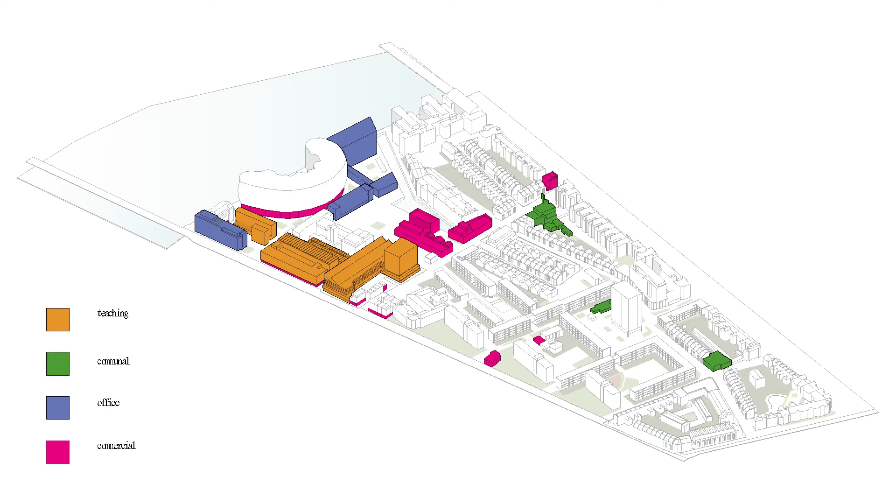It has its own university campus, the Royal College of Art, office space near the river, townhouses as well as two-floor apartments in blocks of flats, a boxing place, and a communal house. The walking routes are good and varied. Streets are relatively nice to walk in.

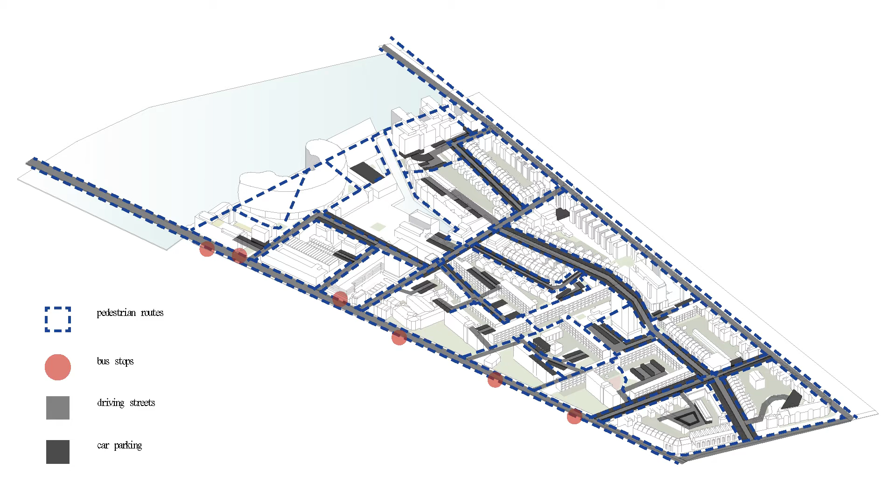However, like in a typical neighborhood in a large city, there is much potential that is lost for various reasons. The squares that could be used for gathering in common, playing in common, gardening in common, or doing sports in common are used mostly for car parking. What could be done here to improve this neighborhood?

We have now chosen the input of communal living for the task of bringing more life to Ethelburga. But what criteria could support our goals? There is not one answer, but based on our studies and research on the subject, we could try choosing communality levels, mixed-use development, pedestrian-friendly development, public property, inclusive design, and cultural identity. The more exact descriptions can be read here.

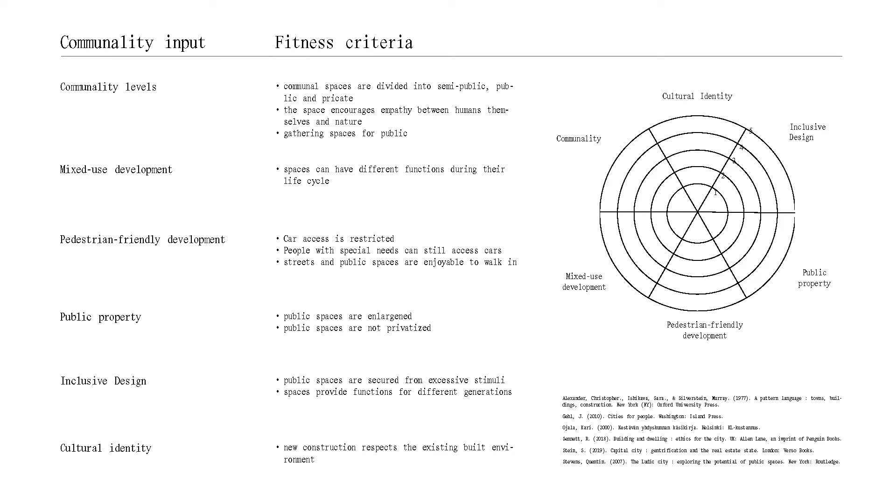Let's generate with augmented intelligence multiple options and then measure with the chart. These are the results AI gave for generating public space. As seen, it is not a simple task. We can conclude, however, that taking singular ideas from each—for example, the architecture in the second image, the pedestrian friendliness of the fourth, and the mixed character of the multi-generational tools—we could generate better space for Ethelburga.

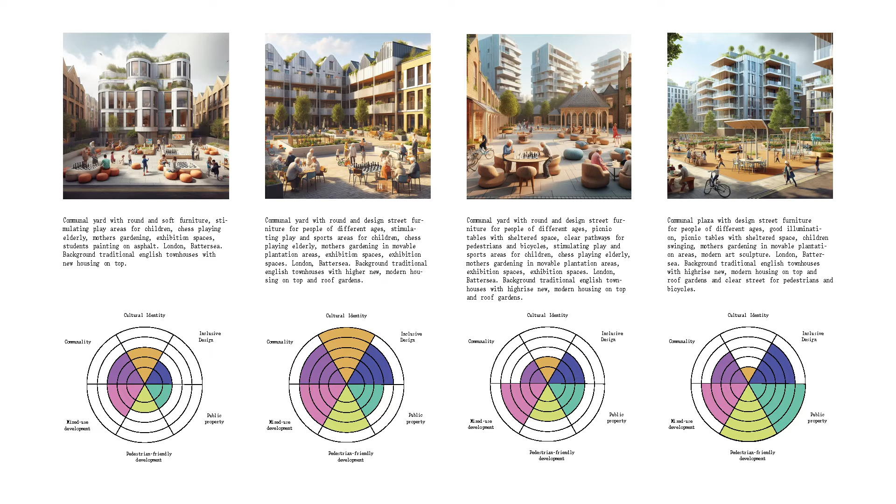Then, let's go back and use this on Ethelburga. As said, the housing from the era of 1960 to 1970s is flexible, in good condition, and easily modifiable. We could use the good floor plans of the existing buildings as modules to generate towards our last justified goals in the area. The floor plans allow the space to be used in mixed ways.

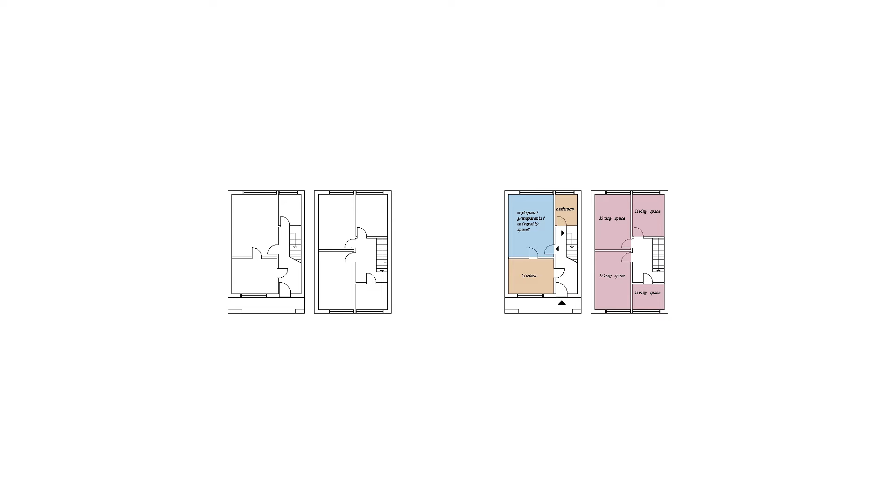Examples of use could include multi-generational use, working spaces, or having a sublet downstairs while the space upstairs is living space. Moreover, the floor plans have potential for a balcony to be added to the side of the hallway. The balcony, to reach the goals of this project, could be used in communal ways. This is one solution for how the evolutionary design could be applied to the estate.

The masses are mainly placed on top of the existing buildings. As a core idea of this project, buildings are not going to be demolished. The masses take evolutionary style from the existing building near the tower. It accentuates the lower masses and brings set points to the facades.

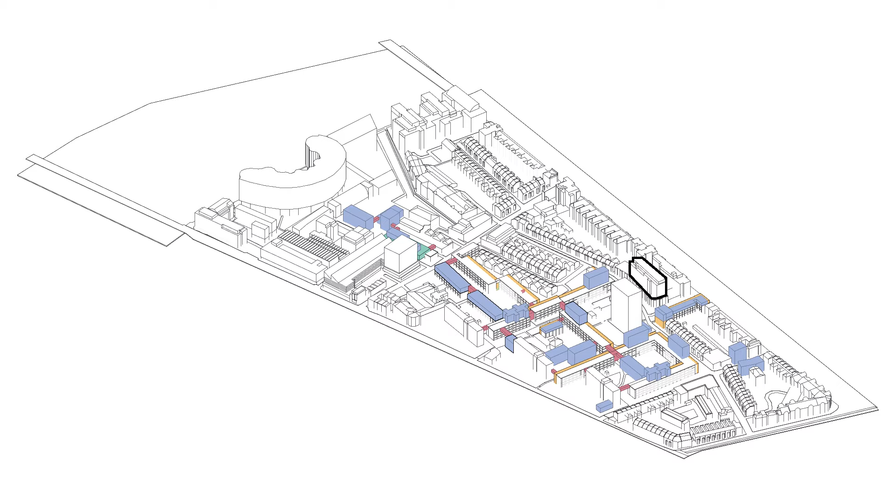The existing buildings have received balconies as mentioned, and they are also connected to each other with hallways. The roofs are turned into communal rooftop gardens and playing and gathering areas. In addition, parking is centralized to a mixed-use building close to the RCA campus building.

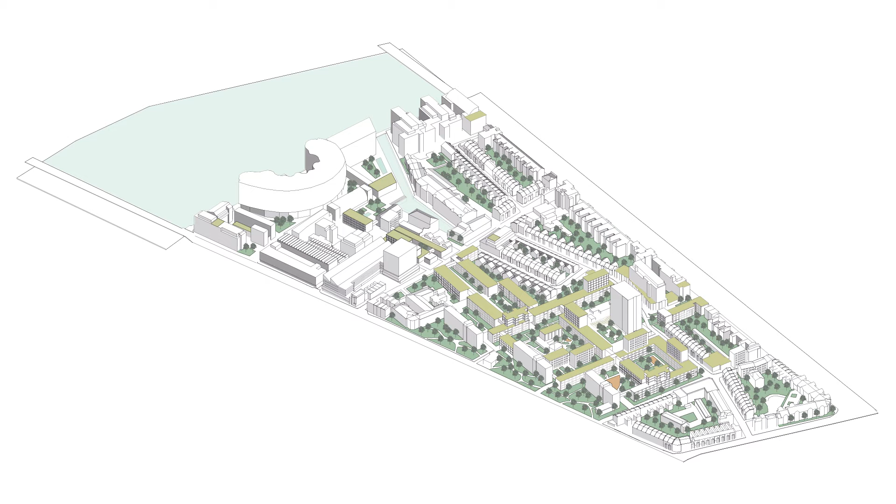And this is how it could look like. The parking areas that have been removed or reduced are used as parks, gardens, and play areas. The area has received multiple new squares for spending time. Look especially near the tower, near Battersea Bridge Road, near the dock, and in the courtyards.

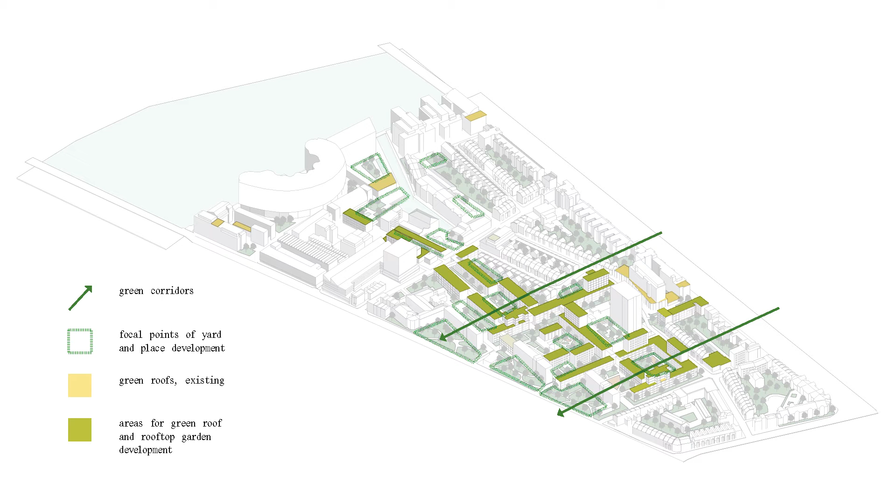New semi-public and public places have been created. Private yards can stay, but with attractive shared spaces, we can try to persuade residents to sharing as well. The green corridors have also improved, which encourages living together with other species as well.

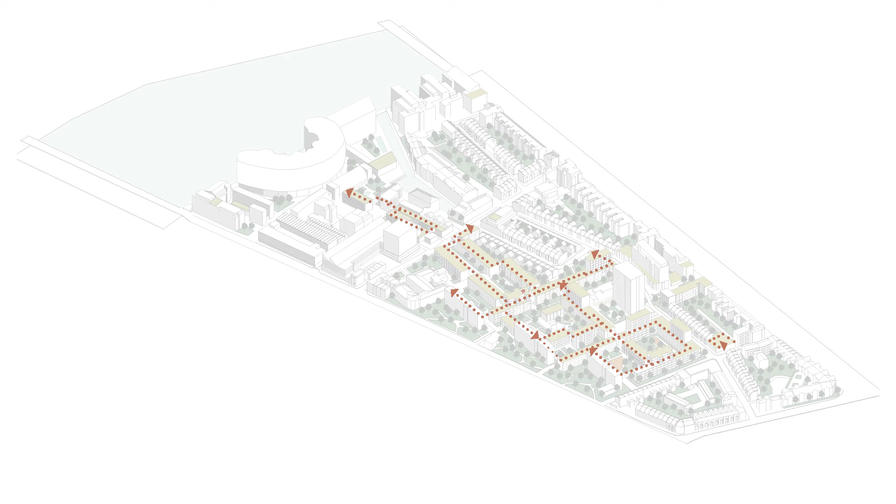The street level has received some new pedestrian routes in this process. Most importantly, however, the pedestrian routes on the rooftops create a very special and multimodal space to walk in.

This all has been reached without totally removing cars. The cars can still access the place. The streets in orange are cycling streets; they have parking lots on the streets. The streets in blue are living streets, where driving is only allowed to access the plots and parking lots. There are barriers ensuring that the pace is low.

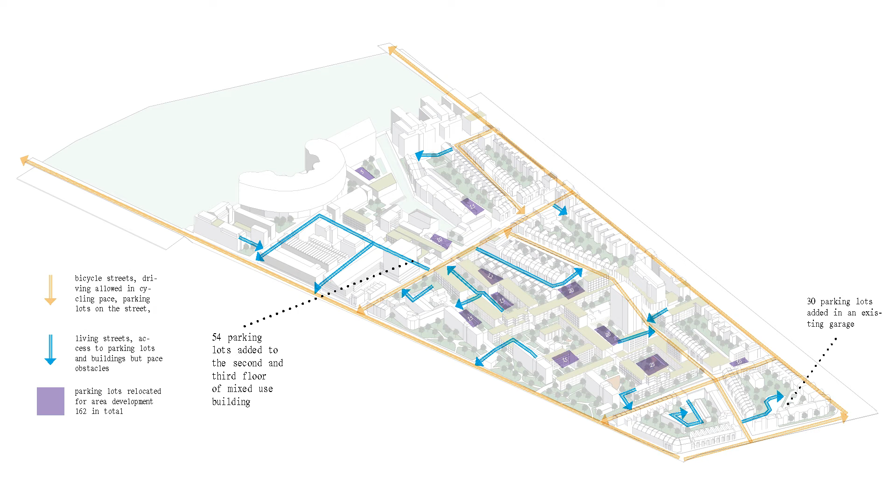Parking lots have been removed from here and there, but there is a new building with parking on the second and third floor. The parking building could be easily turned into another use due to its good dimensions. Also, the existing garage is enlarged. A driving club is suggested, and services are nevertheless developed in the area.

As said, the two-floor apartments can be used for services up to a certain percent. The parking building has commercial space on the first floor. A library can be placed in the old building. A new restaurant building and a convenience store are being built. The boats in the dock can be turned into restaurants. The main service street is the crossing street.

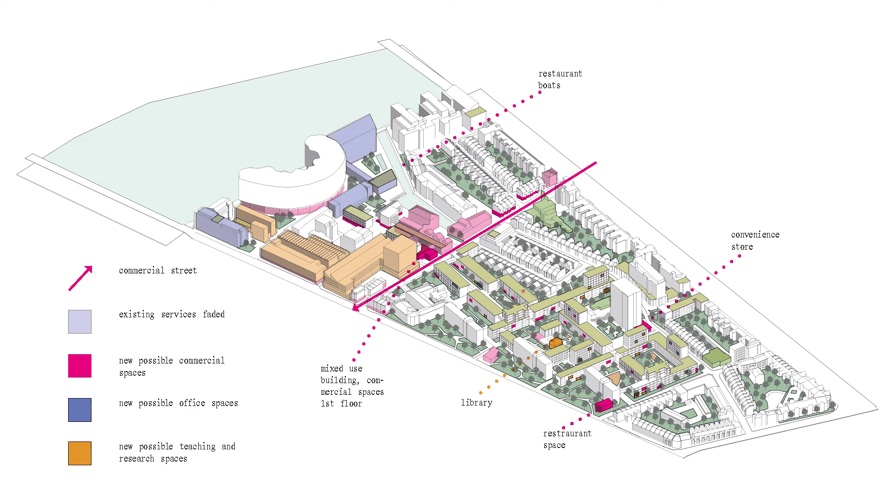Here's the official documents where all the mentioned changes can be tracked. Here's the granulation, new courtyards, here is the section—see the different heights and new gardens and squares? And here's the close-up near the tower.

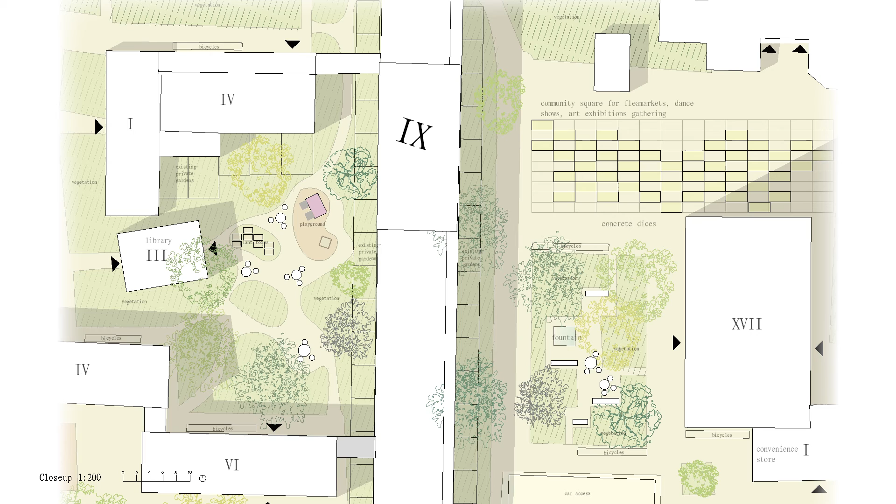The square fits for various uses. It could be used for flea markets, dancing events, art exhibitions, playing, and so forth. Here you can see what the area is like on the street level—various things to do and see. Lastly, here's also an image inside a community balcony.

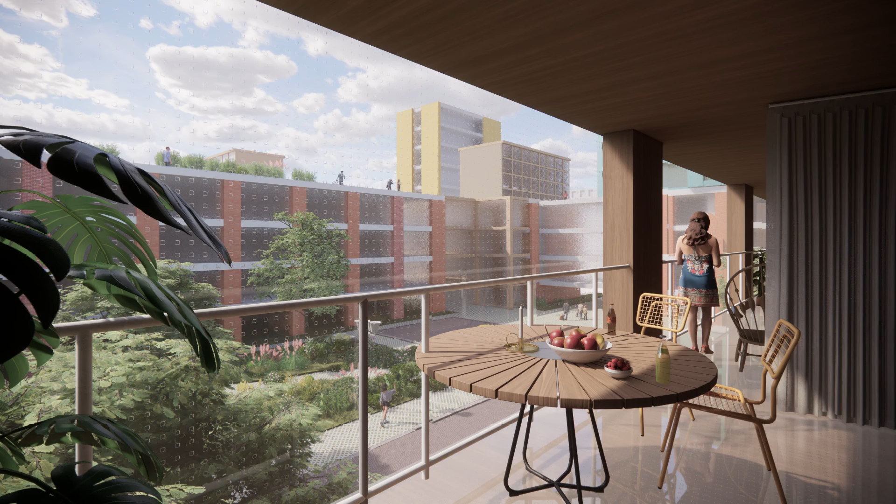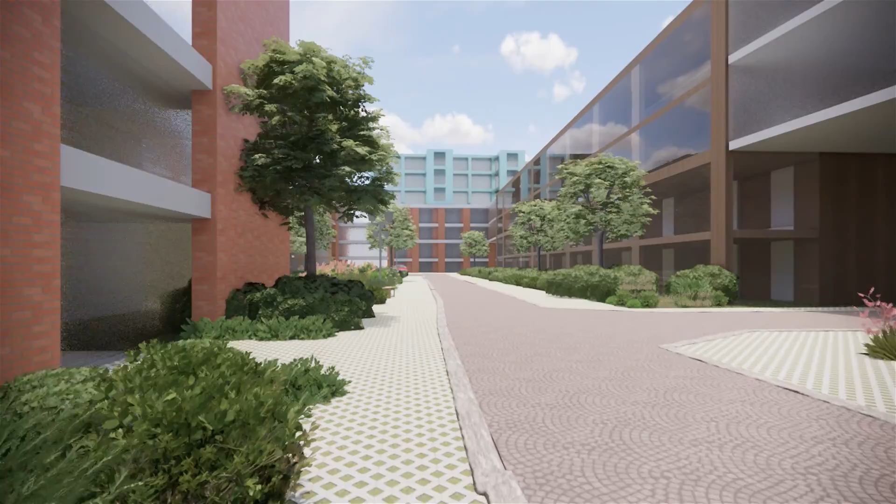Someone once said every apartment should have something beautiful to view. I hope it can be reached now also in Ethelburga. None of this project ensures we can reach the goal of living sustainably in common, but without trying, nothing can be reached. Communal living does not only support a sustainable lifestyle but can make life better for everyone. Thank you for listening.